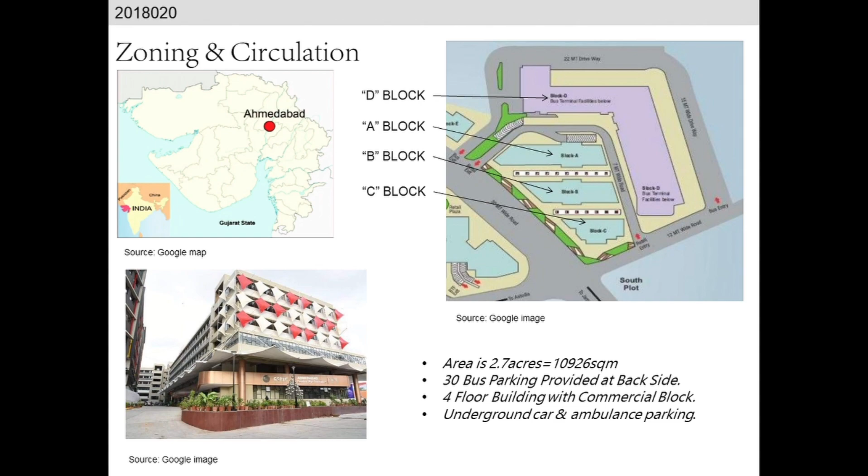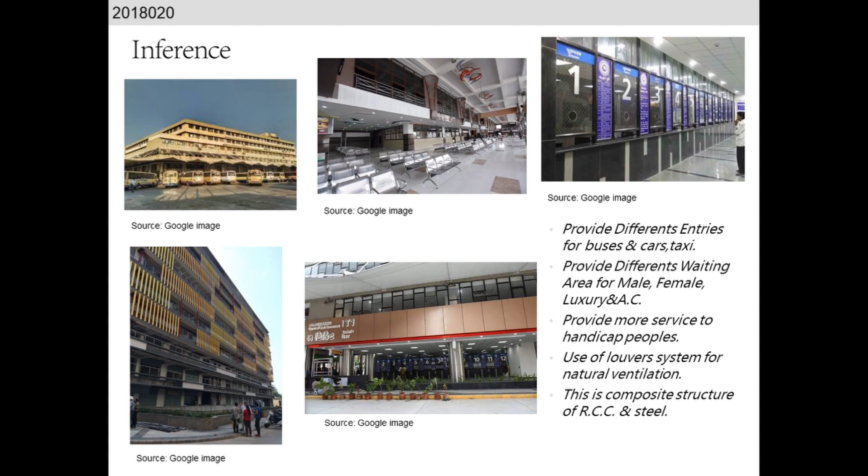Next are some positive points: they provide different entries for buses, cars, and taxis for passengers and bus areas. They provide different waiting areas for different types of people, and more services for handicapped people. They use a louvers system for natural ventilation, and the structure is RCC and steel.

Next is site analysis. Our site is located on the west side of India and east side of Mumbai, 40 kilometers into Navi Mumbai. CIDCO, the City and Industrial Development Corporation, is planning to construct a bus terminal in Khandeshwar.

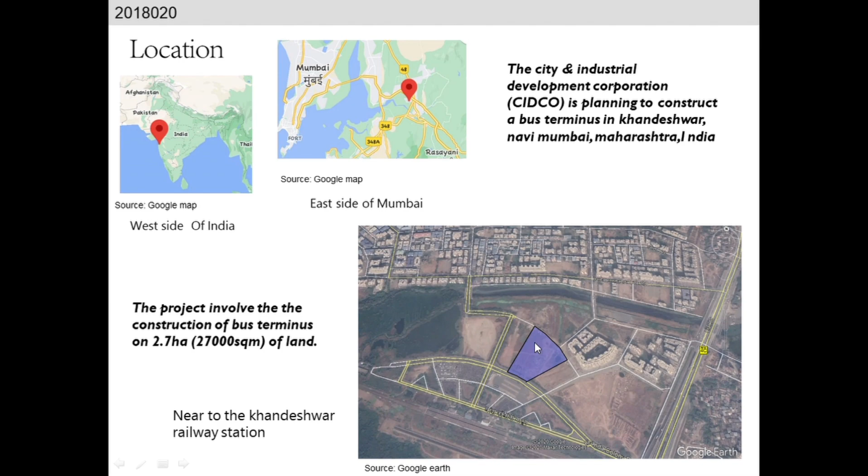The site area is 2.7 hectares, which is 27,000 square meters of land. Regarding the site surrounding: the west side of the site has Khanda Colony Lake with the CIDCO cricket ground, this side has the Adinath Alpine Building Tower, and the south side has two-wheeler and car parking along with the Khandeshwar railway station. These are some actual images of the site.

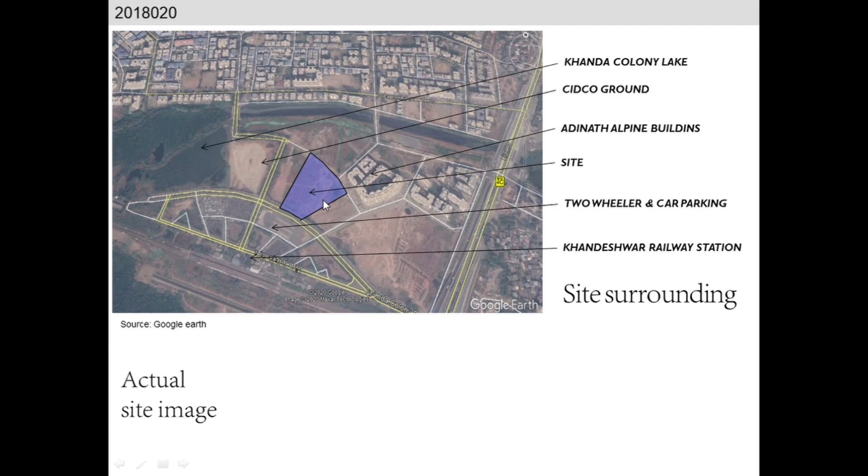Next is the concept. There are some geometric forms such as rectangles, squares, and hexagons. The hexagon has more area than a rectangle, that's why I used the hexagon. At the center I use a hexagon, combined with 6 more hexagons surrounding it, and 3 hexagons eliminated with one big huge triangle. This is my final shape.

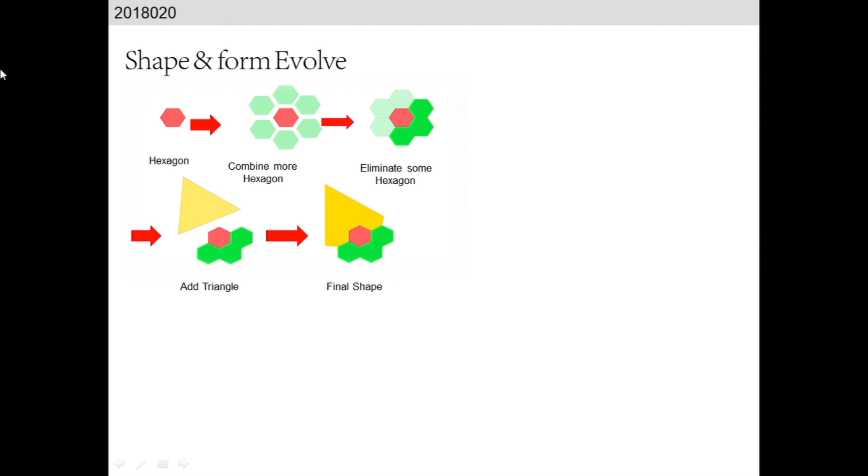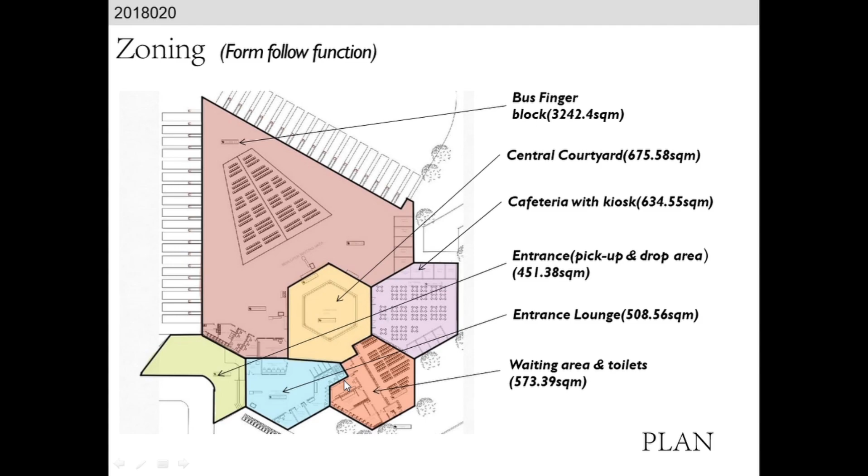Zoning: form follows function. When a passenger arrives at the entrance with the pick-up and drop area, he will go into the entrance lounge, then go either into the bus base, the cafeteria block, or the waiting area. That's why I provided a center courtyard with divisions.

Form follows climate, site zoning. This is my site zoning. At the west side I provide the bus entrance, then the washing area and fuel area with the generator room. This is the ideal bus parking, then the loading-unloading area for foods and kiosks, and next is a residual water body.

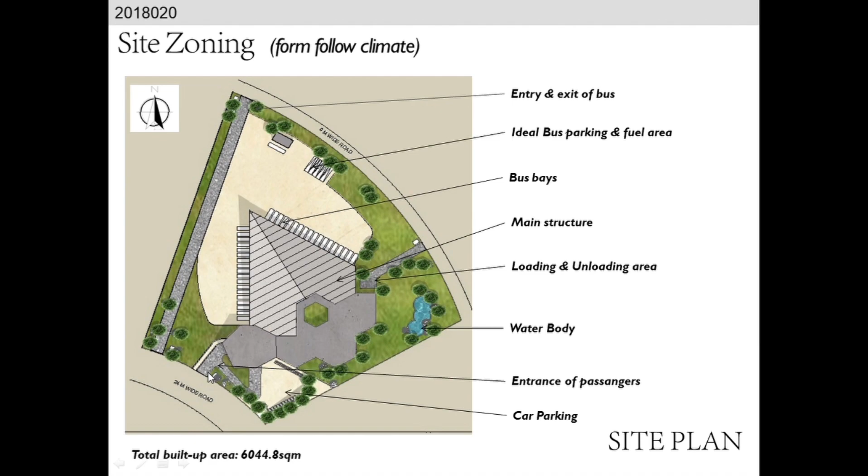Next is my car parking for visitors and passengers. This is my entrance for pedestrians, and this is my entrance for passengers. At the center I will provide my structure.

Vegetation: I will provide 35 to 40% of the scope as green area, and 50 to 55% as paved area shown in yellow, which is basically ceramic, bauxite, and diatomic material, which is heat resistant. A lesser amount of material is flexible paved area, which is heat absorbing, so I use that very little.

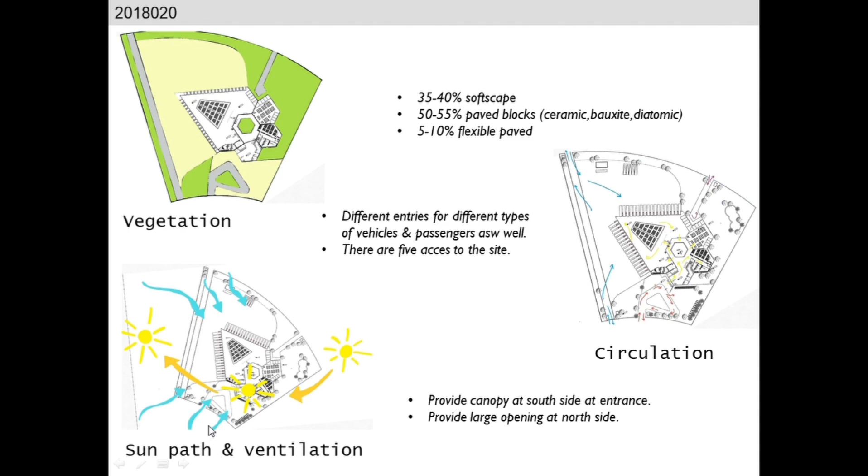Next is circulation. The red color shows passenger entrance and circulation, the yellow one is the movement of the passenger in the structure, and the blue one is the bus bay circulation. This is the sun path and ventilation diagram.

Next is plan and details. This is my ground floor plan, with the entrance lounge here, including the ticket counter and inquiry counters.

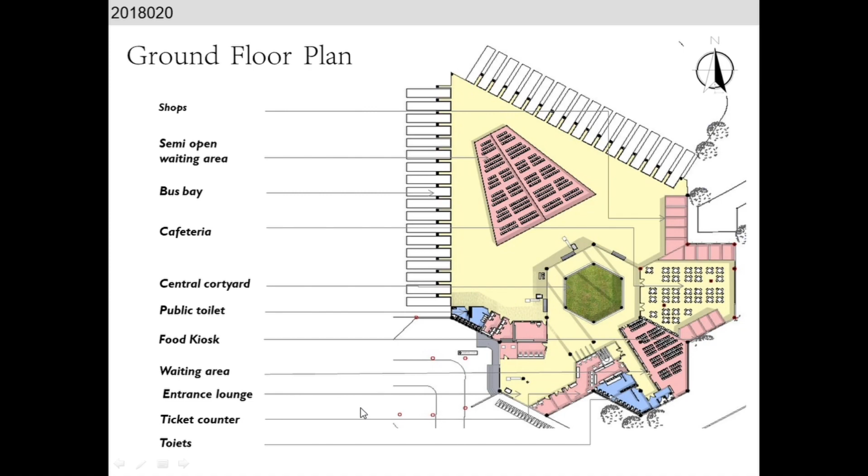I am dividing my structure into 5 zones: the first zone is the entrance lounge, the second zone is the waiting area with toilets, the third zone is the cafeteria block, the fourth zone is the bus finger with the central courtyard, and the fifth zone is the administration block.

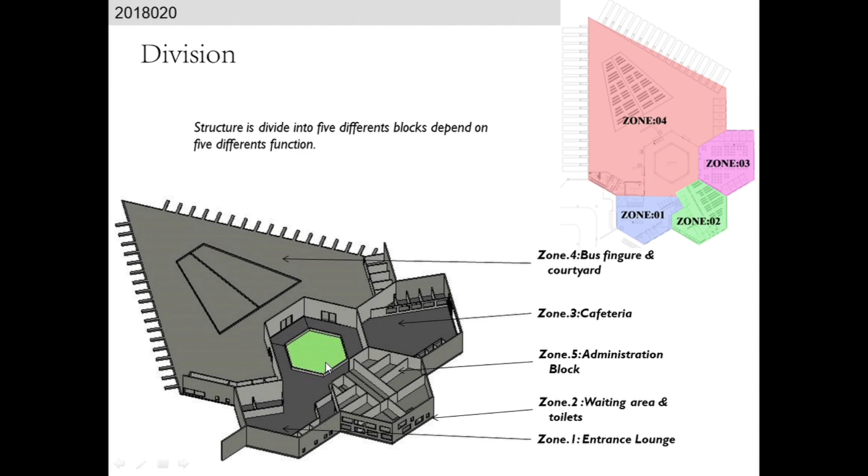Okay, start from the first zone. Basically, this is my entrance lounge zone, which is a 508.56 square meter area. This is my entrance.

At the entrance I will provide the checking area with the police post area near the checking area, and this is my ATM block which has 2 ATMs, and the next is my inquiry counter. I will provide a free wheelchair area room at the entrance for services for handicapped people. Next is my ticket counter area.

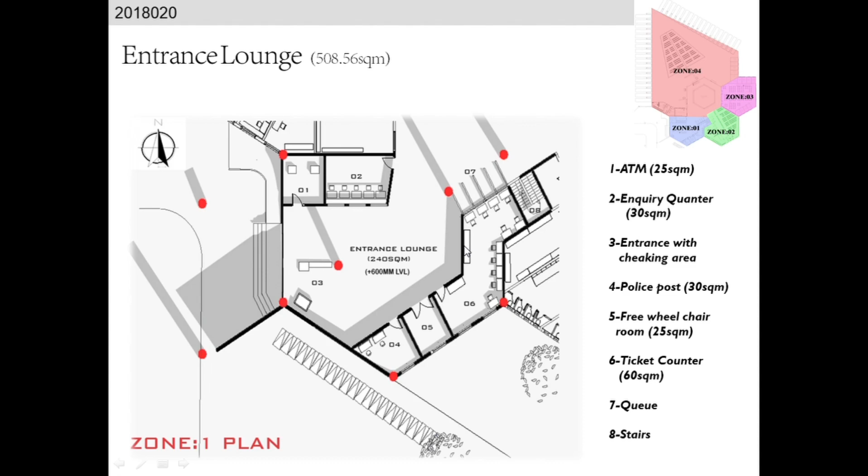The second zone is a waiting area with the toilet area, 573.39 square meter area. This is my waiting area which can contain 190 to 195 people passenger capacity. This is my window facing the east side, which is a very huge window.

In front of the waiting area I will provide the charging kiosk, baggage area, toilet for men, toilet for women, and the toilet for handicapped people with standard dimensions.

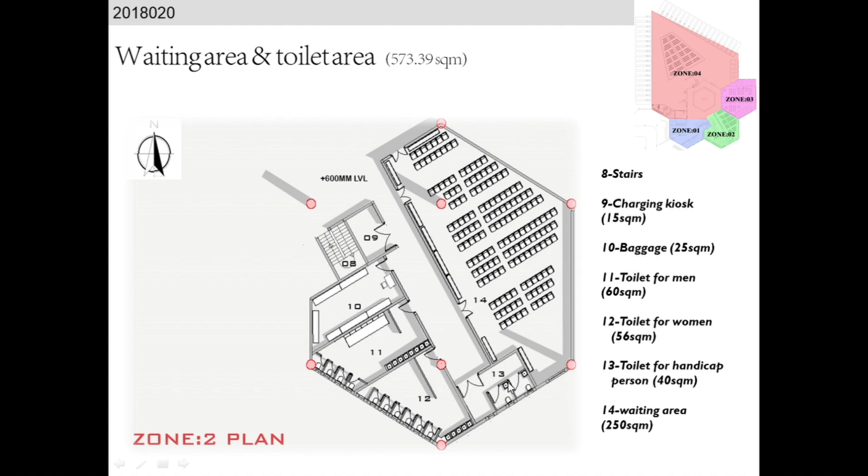Next is the cafeteria block with the food kiosk, drinking water area, which has 200 to 215 dining area capacity. This also faces the east side, that's why I provide the huge window.

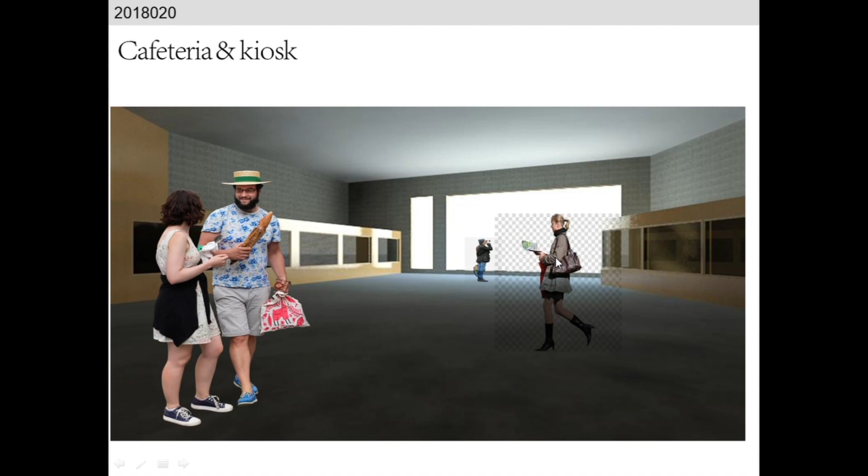This is my view of the cafeteria block.

Next is the bus finger with the central courtyard. Basically, this is my arrival part and this is the departure area. This is 18 arrival and 18 departure with semi-open waiting area with 200 passenger capacity, where they can wait for the buses.

This is a public toilet I will provide at the bus finger for bus conductors and drivers, and this is the lost and found room. Next is my traffic supervisor room and the driver retiring room, which is the administration block, and this is my shops area I provide at the bus finger.

These two are my entrances of the bus finger, and this is my exit of the bus finger, and this is my central courtyard which is very open to sky.

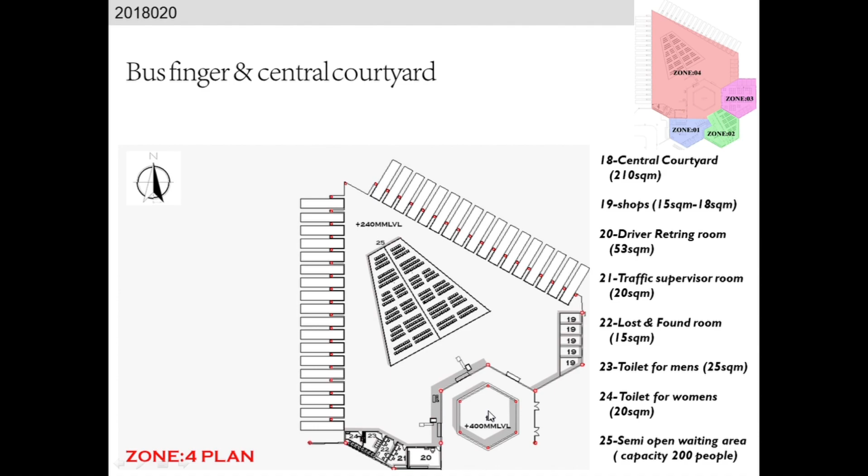The fifth zone is my administration block. They can come from here. This is my balcony over here, where they can view the bus central courtyard.

Next is my manager room and superintendent room, account officer room, account department, crew restroom, and a toilet for the officers. The next is the office area of the bus operator room, and the next is the CCTV camera and server room.

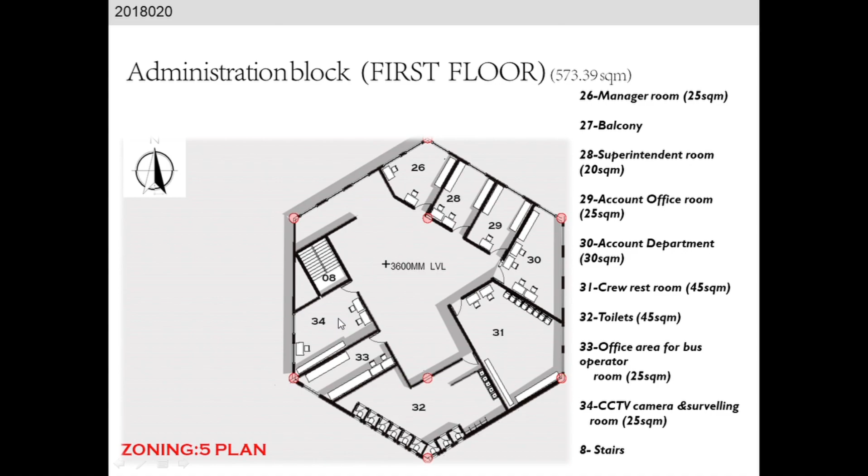Next is the site plan. This is my site plan, which includes the idle bus parking. This is a paved area, the paving blocks, waffles.

This is my PTFE tensile roof, which is a canopy. This is my waffle slab, which is double floor height with 7 meters in height. The site area is 27,000 square meter, and the built up area is the

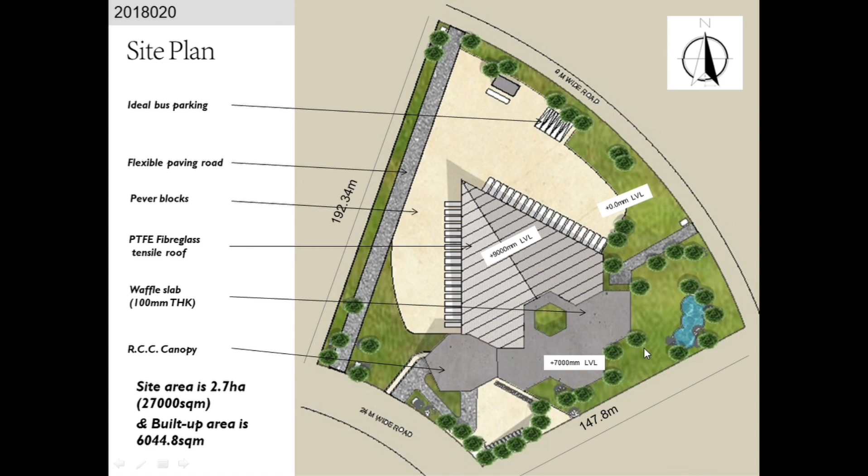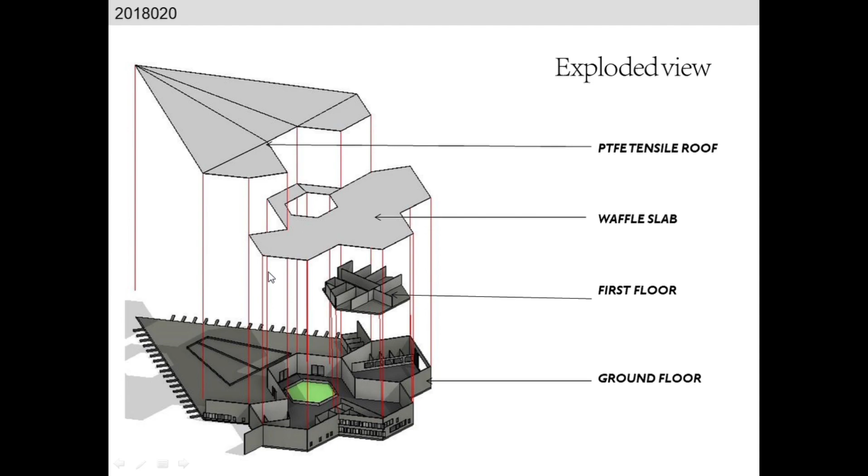6,044.8 square meter. Details of the roof: this is my PTFE tensile roof, which is a canopy roof, and this is my waffle slab. This is the first floor and the ground floor.

Waffle slab: basically, the waffle slab is more technical and economical roof among the conventional systems because we can achieve less material. Waffle's roof is an environmentally friendly slab. Waffle pattern is aesthetically pleasing, and it has a greater load capacity.

This is my hexagon plan, which is one unit of my plan. The red one is my RCC columns, which is 900 diameter. This is the placement of the column in the structure, and the column size is 900 diameter with 15 meter distance to each other.

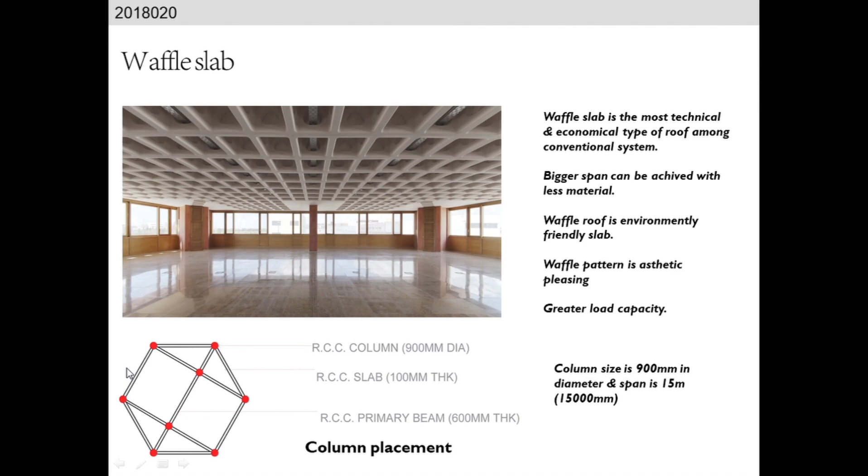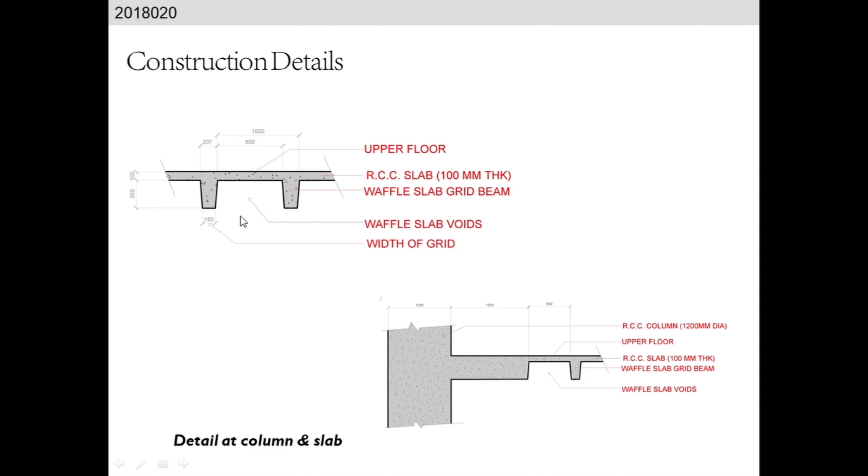Construction detail of the waffle slab: this is the upper floor, and this is my RCC slab, which is 100 mm, and this is the waffle grid and the waffle slab voids here. And these are some details.

Next is a PTFE fiberglass tensile canopy. Basically, this is polytetrafluoroethylene material, which is a lightweight material, versatile in shape and structure.

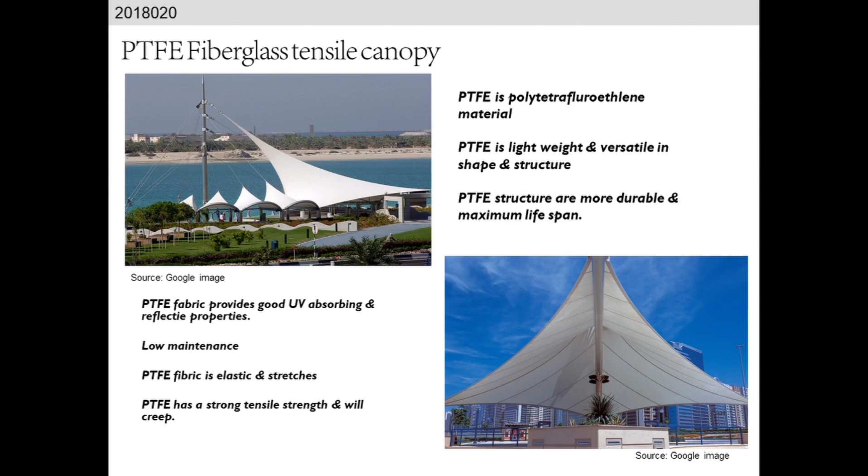Next is the sections. These are my section lines. This is my section AA.

As you can see here, the bus finger with the central courtyard. This is my administration block above, and then down is the waiting area. As you can see here, the waffle slab detailing. This is my bus finger with the entrance lounge.

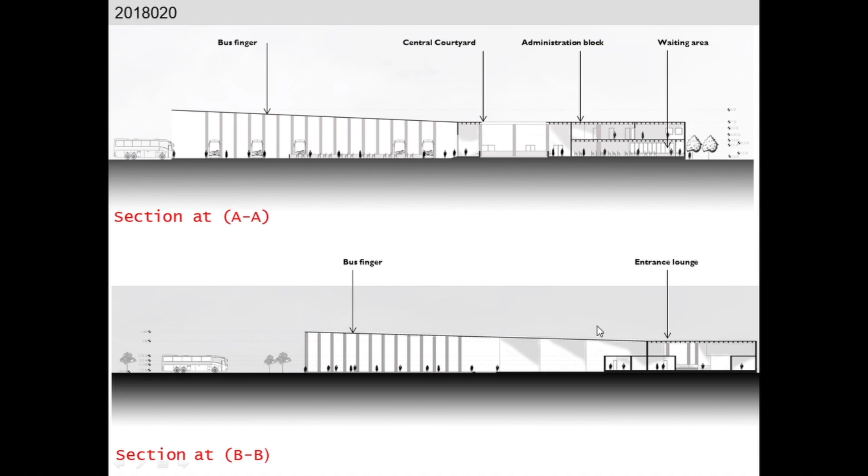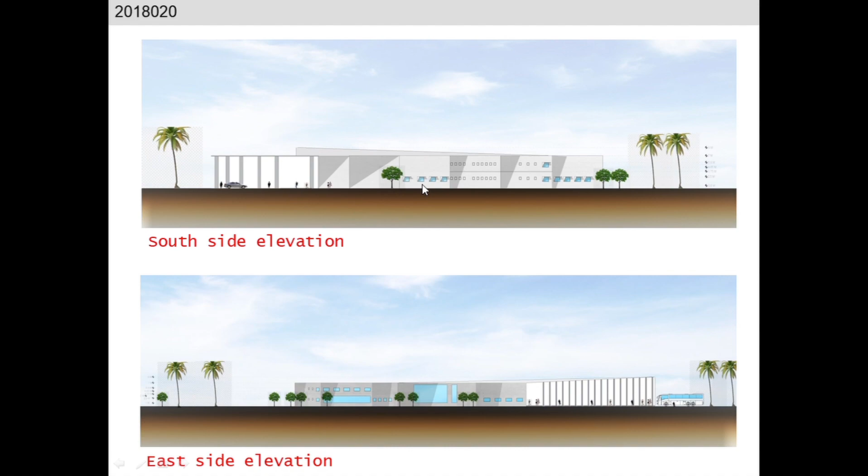This is the east side elevation, which is the waiting area and the cafeteria block with the huge windows.